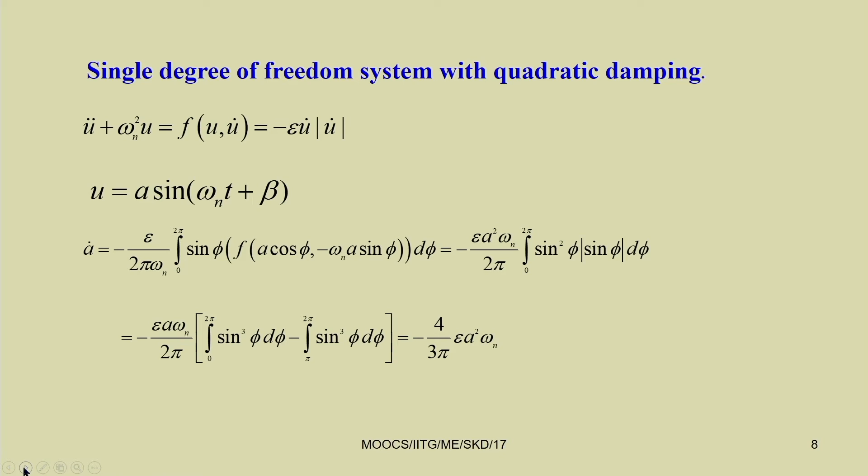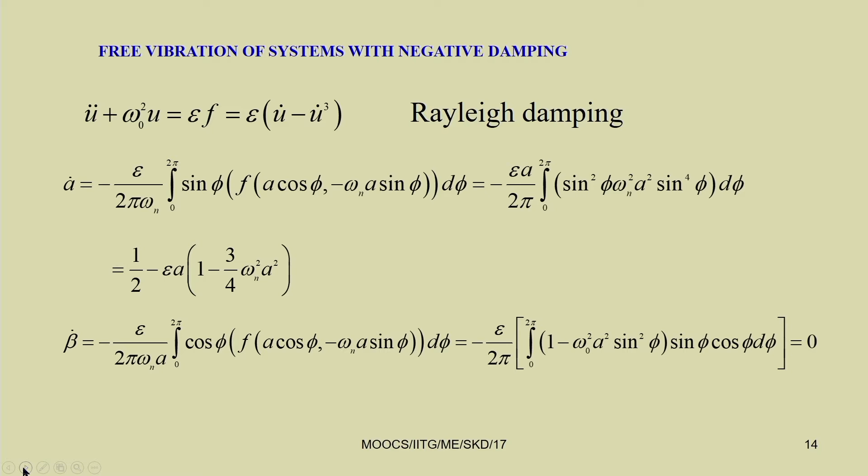quadratic damping, and we have found the response for all these methods. Also, we have taken Rayleigh damping, then the Van der Pol oscillator, and we have studied the free vibration response of systems with different types of damping. Further, we have taken single degree of freedom systems with the Duffing oscillator. Here we have studied systems with both weak and strong forcing terms.

In many cases the system may not be only a single degree of freedom system. It may be a multi degree of freedom system or a continuous system. In case of a multi degree of freedom system, one can reduce it to a single degree of freedom system by using the modal analysis method. So, briefly let me tell how we can reduce. For example, let us take a 2 degree of freedom system and see how we can reduce it to a single degree of freedom system.

So, let us take a coupled 2 degree of freedom equation. In case of a single degree of freedom system, we write the equation in this form: m x double dot plus k x plus c x dot. Let me take some nonlinearity also, plus alpha x cube, equal to f sin omega t. In case of a multi degree of freedom system, m will be replaced by a mass matrix. Similarly, k will be replaced by a stiffness matrix K.

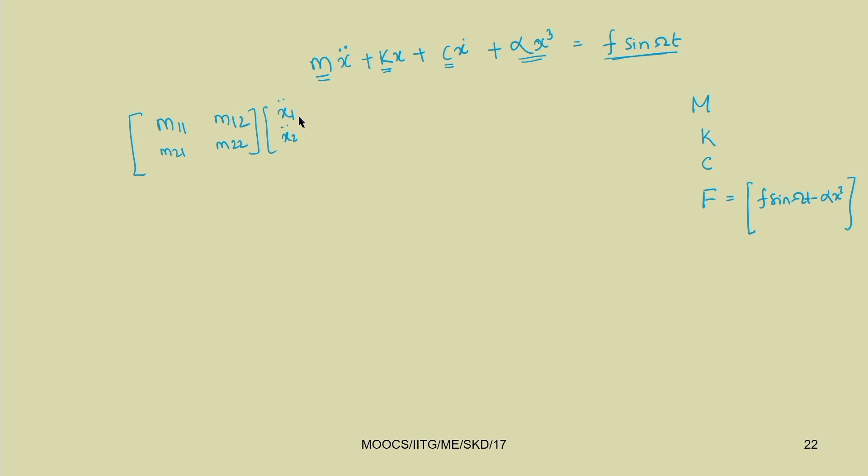For example, let us take a mass matrix like this: M11, M12, M21, M22, multiplied by x1 double dot, x2 double dot, plus similarly K11, K12, K21, K22 multiplied by x1, x2. Similarly, for damping I can write C11, C12, C21, C22 into x1 dot, x2 dot.

Now, for the nonlinearity, let me write it in this way. We are taking x equal to x1 and x2. So, our nonlinearity can be of the form x1 cube, x2 cube, x1 square x2, or x2 square x1. So, these are the 4 options for this nonlinearity. Using these 4 options I can write, for example, alpha 1 x1 cube,

alpha 1 x1 cube plus alpha 2. Let us put the subscripts also: alpha 11 x1 cube plus alpha 12 x2 cube, plus alpha 13 x1 square x2 plus alpha 14 x2 square x1. So, this way you can write it.

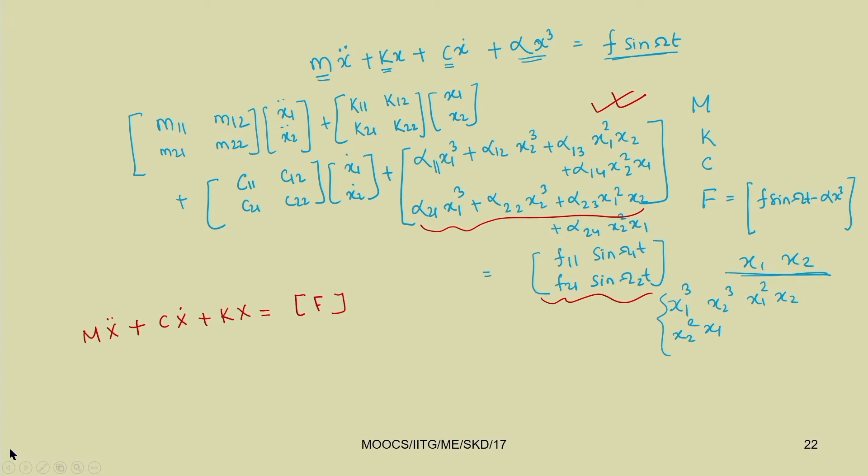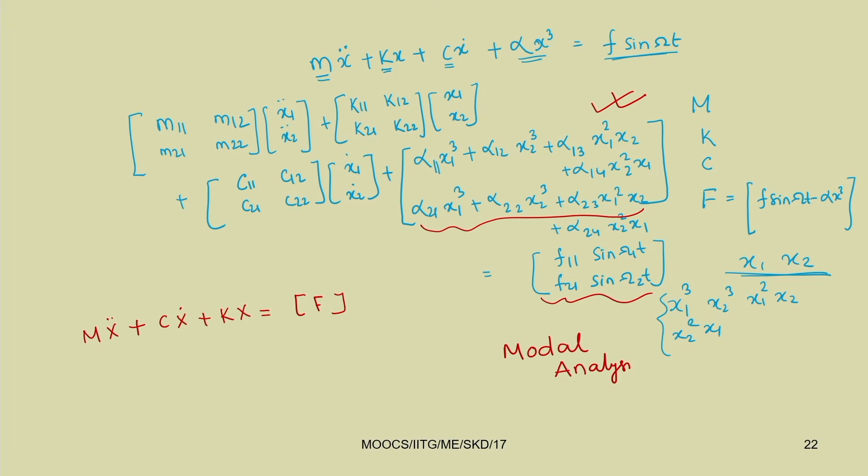As you are familiar with modal analysis, in modal analysis how do we proceed? Generally in modal analysis, the first step is to take m inverse k equal to a. After taking m inverse k equal to a, we can also take this damping as Rayleigh damping.

We can take this equal to alpha m plus beta k. This is known as Rayleigh or proportional damping. In the case of proportional damping, the damping term is considered to be proportional to the mass matrix and

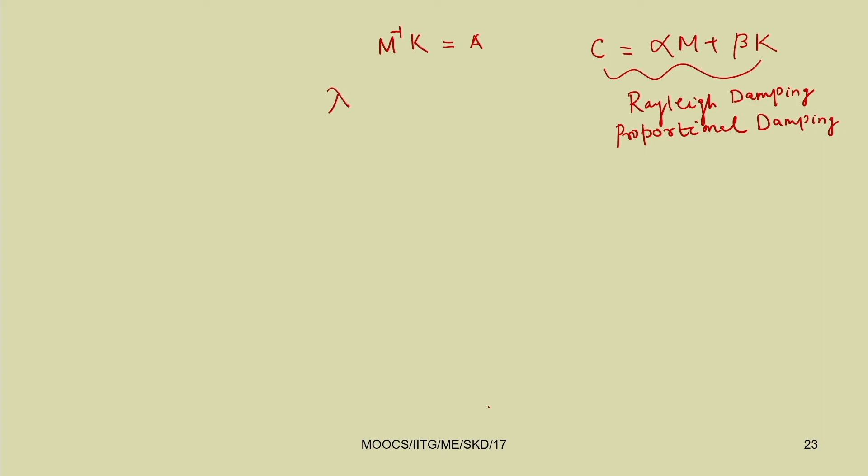the stiffness matrix. After taking m inverse k equal to a, we can find the eigenvalues and eigenvectors of a. Let lambda be the eigenvalue. Since this is 2 by 2, we have lambda 1 and lambda 2 as the eigenvalues of A. Corresponding to these eigenvalues we have the eigenvectors. Let P be the eigenvectors of A.

After finding the eigenvalues and eigenvectors, we know their property: P transpose M P is a diagonal matrix. Similarly, P transpose K P is also a diagonal matrix. So using this orthogonality principle, we can uncouple

the mass, stiffness and damping matrices. We can take P transpose M P and P transpose K P and uncouple, because these become diagonal. Otherwise, one can also take the weighted modal matrix.

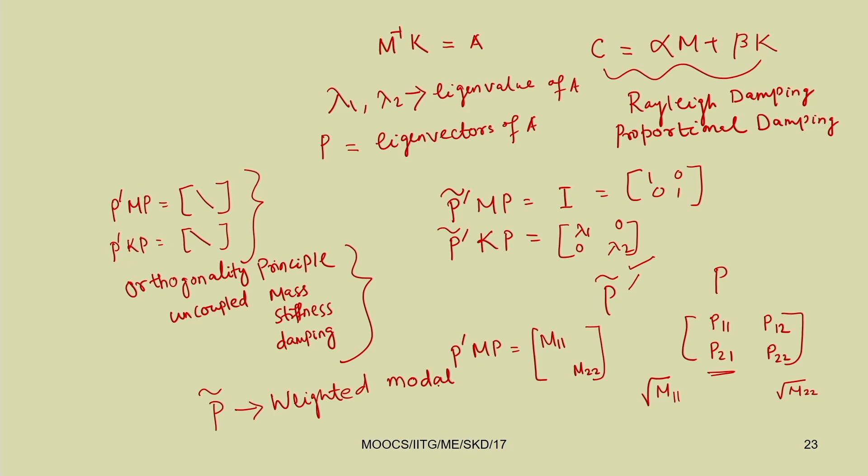Weighted modal matrix. So, either by using this modal matrix method or by using this weighted modal matrix method, we can uncouple the equation. So, now let us see. Our equation becomes, for example, let me use this weighted modal matrix.

Our original equation is m x double dot plus c x dot plus k x. I have taken all the nonlinear terms to the right hand side, so let it be equal to F. So, what are we doing here? Let us substitute x equal to P weighted modal matrix into y.

In this case I can write M P weighted modal matrix y double dot plus, for C I can write alpha M plus beta K, so alpha M P y dot plus beta K P y dot, plus K P weighted modal matrix y. Similarly, we have to substitute into this F.

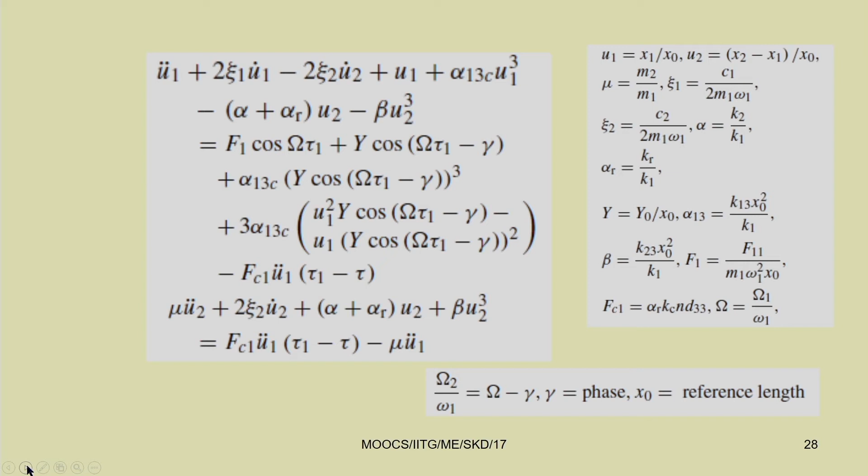You can see here you have u1 double dot. Though the mass matrix is uncoupled, the stiffness and damping matrices are coupled, along with nonlinear terms. In this case, by using the modal analysis method, first you can uncouple these equations only up to the linear spring and linear damper. All the nonlinear terms you may shift to the right hand side and do your analysis. Otherwise, you can apply the method of multiple scales you have studied before, or you may use the harmonic balance method.

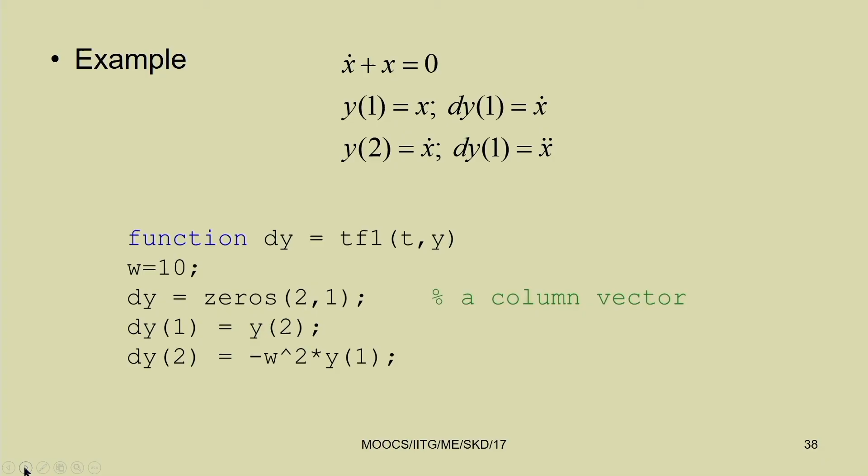Already we know what we mean by stable point and unstable point. If with slight perturbation the response comes back to the original position, then it is a stable response. But if with slight perturbation the system response grows, then it becomes an unstable response. Sometimes we also use the word asymptotically stable: if as time t tends to infinity the displaced response comes back to the original position, then it is asymptotically stable. Today we will also see what we mean by bifurcation.

Already we have studied this. For a given system d²x/dt² plus f(x) equal to 0, a second order equation, we can write it as first order equations, dx/dt equal to y and dy/dt equal to minus f(x), and by writing dx/dt in the form ax plus by and dy/dt in the form cx plus dy, we can find the Jacobian matrix and the eigenvalues of the Jacobian matrix.

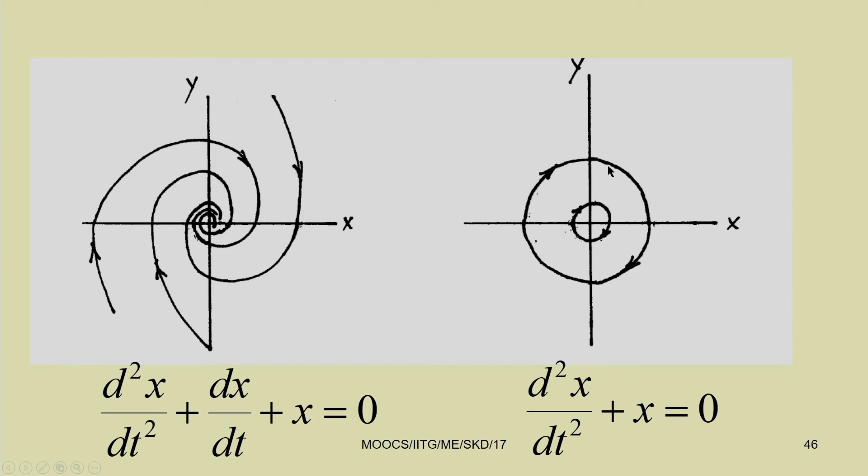So, d²x/dt² minus x equal to 0. So, in this case we can get a point. Similarly, in this case also d²x/dt² plus x dot plus x. So, spiral we are getting, and here also we are getting the spiral. And here, d²x/dt² plus x equal to 0, so here is the center we are getting. So, this way we got different types of responses.

Also, some of the typical responses we may see in these nonlinear systems. For example, let me plot a by omega n, the natural frequency. Sometimes you may plot this with respect to the detuning parameter sigma also, amplitude a versus sigma. So, in these cases, sometimes the response will look like this, sometimes you can have multiple responses. Here you can observe.

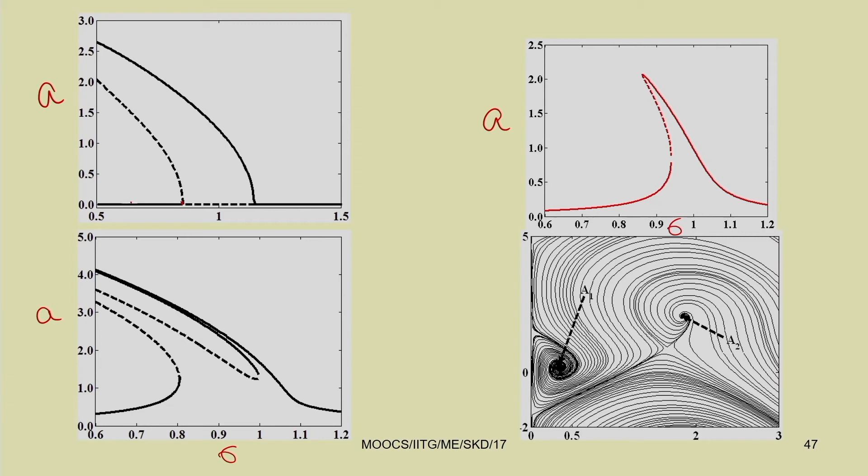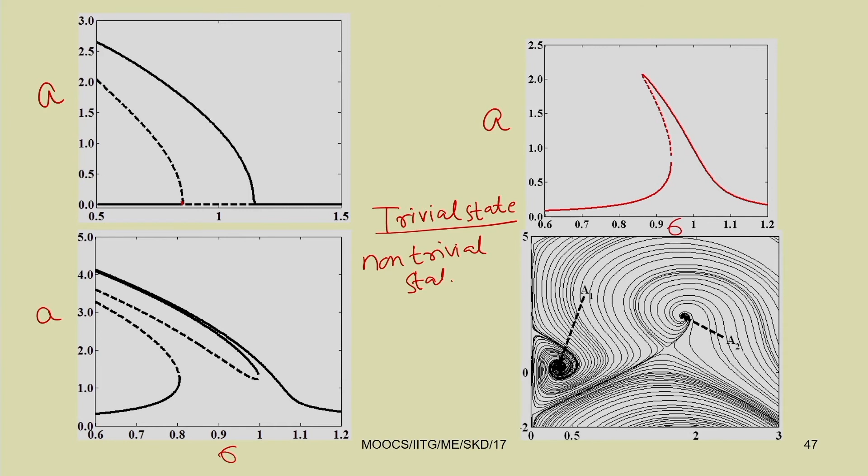So, up to this point, this is the 0 line. The 0 line is also known as the trivial state, and you should be familiar with the trivial state and non-trivial state. When the response x is 0, that is the trivial state. If you have a non-zero response, this is the non-trivial state.

So, up to, for example, sigma equal to this, the system has a trivial state. Similarly, after this also the system has a trivial state. Between this and this point, by performing the eigenvalue analysis, we have seen the system response is unstable. Up to this point the system has a stable and another unstable response and also one more stable response.

So, what is happening here? If you take a point here, it is going from stable to unstable. By slightly increasing the sigma value, the system will jump from this response to this response, from this stable to this stable point. Similarly, at this point the system will have only the stable trivial state response.

So, here you can observe the stability of the system is changing. The trivial state stability is changing from stable to unstable. This is known as a bifurcation point. If there is any qualitative or quantitative change in the response at a particular critical point, that point is known as the critical bifurcation point. There are several different types of bifurcation points.

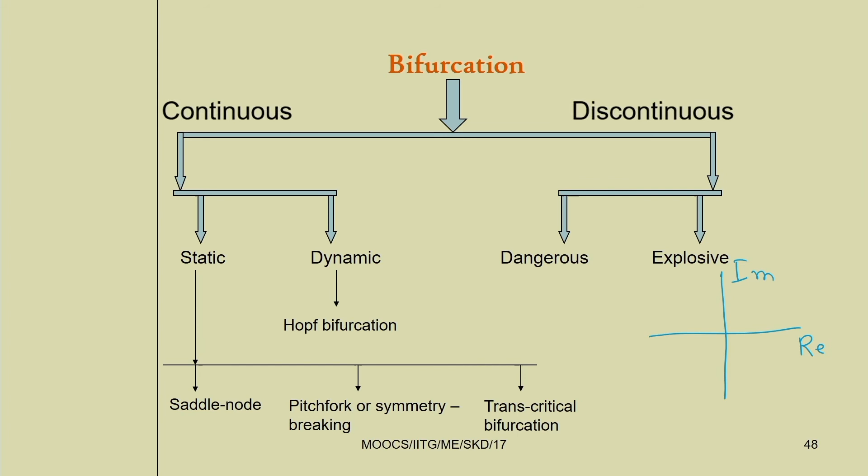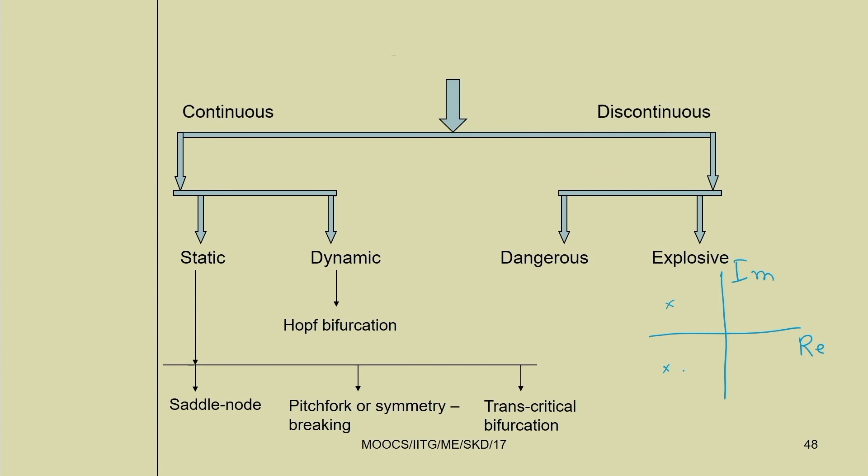So, in case of a multi degrees of freedom system, you will have multiple eigenvalues. Now, by changing the system parameter, for example, you have changed one of the system parameters and observed how the eigenvalues are changing. In that case, you can have a pair of complex conjugate eigenvalues. Let this pair of complex conjugates now cross. Then it becomes a real value, two equal roots.

Now it is crossing the imaginary axis with value 0. So, if by changing the parameter it crosses the imaginary axis with 0 value, that means it will have a real part only, then this type of bifurcation is known as static bifurcation. In case of static bifurcation, at the critical point the eigenvalue will have a 0 value: 0 real part and 0 imaginary part.

That is for static bifurcation. For dynamic bifurcation, it will cross the imaginary axis with non-zero value. If it is crossing the imaginary axis with non-zero value, that means the real part is 0, so the eigenvalue has a pair of imaginary roots. Due to the presence of this pair of imaginary roots, it will have a frequency which leads to a periodic response.

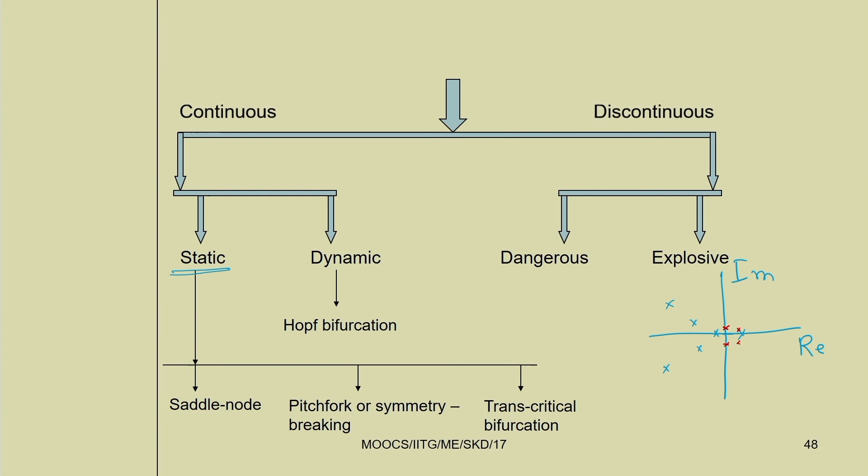If the imaginary parts are non-zero at this critical point, then it leads to a Hopf bifurcation point, but if the imaginary parts are 0, then you will have the static bifurcation. In case of static bifurcation, you have three different types of bifurcation. One is the saddle node bifurcation, second one is the pitchfork or symmetry breaking, and third one is the transcritical bifurcation. So, let us see the saddle node bifurcation, its generic form and how you can find it.

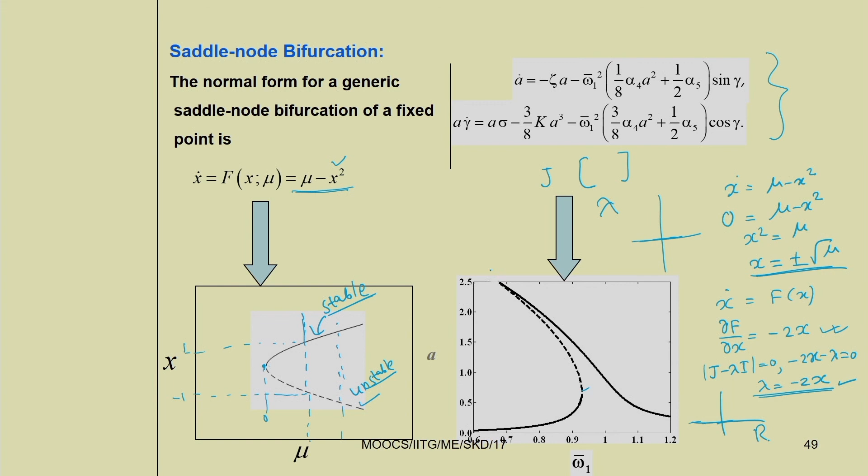After finding lambda, corresponding to these points you can plot the real part and the imaginary part of the eigenvalue, and verify that at this critical point and this point it crosses the imaginary axis with 0 value. It looks like a saddle point, so this is known as a saddle node bifurcation point. These two are the saddle node bifurcation points.

Similarly, let us see one more case, pitchfork bifurcation, which I have already shown. If you understand the first order equation, you can understand the other equations. x dot equal to mu x minus x square. For a fixed point, x dot equal to 0, so 0 equal to mu x minus x square. Taking x common, this becomes x into mu minus x, so x equal to 0 is a solution and x equal to mu is also a solution.

This would be mu x minus x cube. In this case, taking x common, this becomes x square equal to mu. So, you have two solutions. One is x equal to 0, the trivial state, and the other is mu equal to x square, or x equal to plus minus root mu, as you have seen in the previous case.

Corresponding to this plus minus root mu, you will have two branches. This is one branch, this is another branch. In addition to that you have the trivial state. So, this is the trivial state and these two are the non-trivial states.

Similarly, here you have these two non-trivial states, and corresponding to this is the trivial state. If now, for example, you reduce this value from the stable non-trivial state, this type of bifurcation is known as supercritical pitchfork bifurcation. And here, from stable it is going to unstable, or from unstable it is going to another unstable and stable. So this is known as subcritical pitchfork bifurcation. So this is subcritical and this is supercritical pitchfork bifurcation.

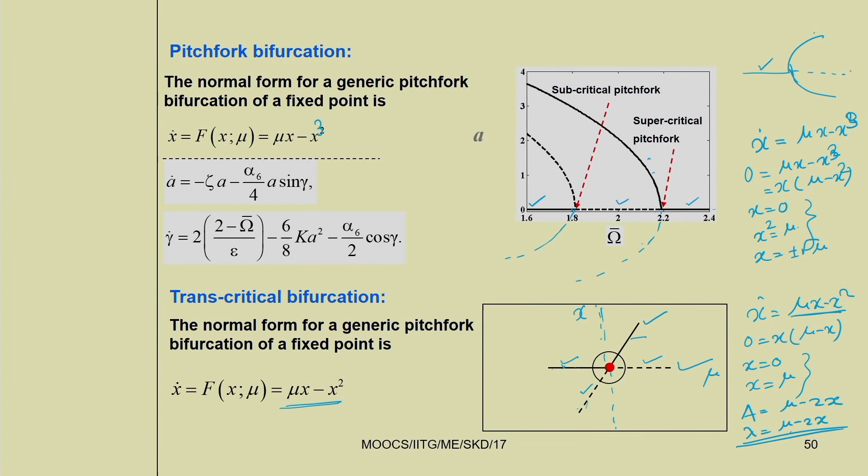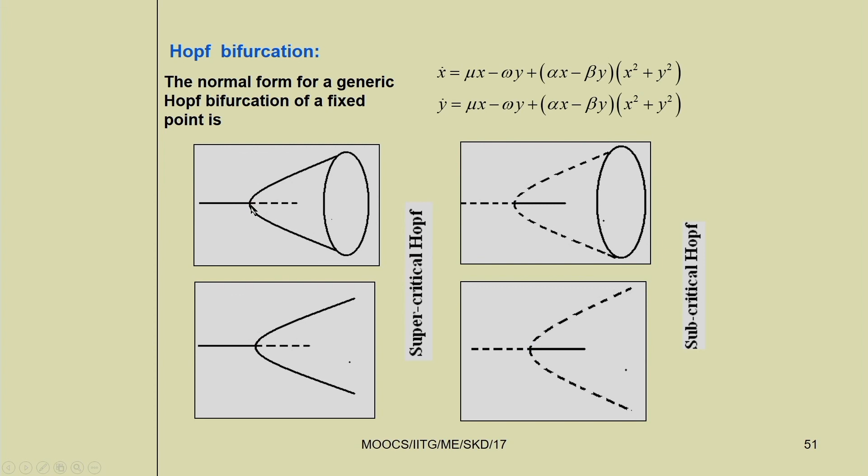And in the next class we are going to study the Hopf bifurcation point. Here we can see at the bifurcation point the stable fixed point branch becomes an unstable fixed point branch, but it will give rise to a periodic response. So next class we will study the Hopf bifurcation, and also other different types of responses for nonlinear systems. Thank you.